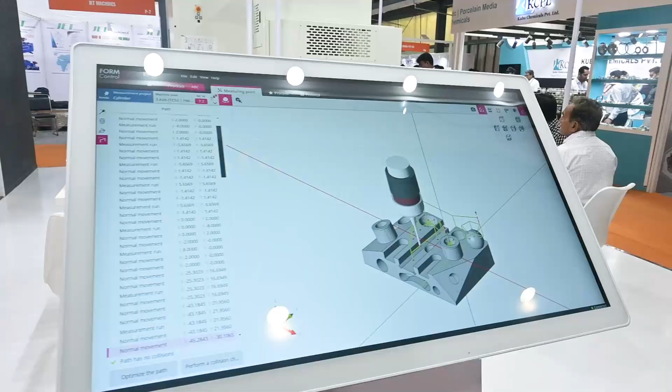Myself, Iranna Sidnal, responsible for business development and marketing activity, West and North regions. We are from Blum. Blum is a German-based organization, a pioneer in production metrology systems based in southern Germany, with more than 50 years of experience in the field. We have divisions like compound division, machining division, and measurement division.

Here we are demonstrating live our production metrology systems like tool setting systems and work setting systems. In tool setting systems, we have contact type and non-contact type systems where you can check length, diameter, tool form, and tool wear on the machine.

Production metrology plays a major role during machining. Everybody says they will check metrology pre or post machining, but if you control metrology during machining, the end product will be without deviations. The main intention behind implementing production metrology in the machine tool industry is to reduce non-cutting time, increase productivity, and reduce human errors, which increases production in both die mold and part manufacturing.

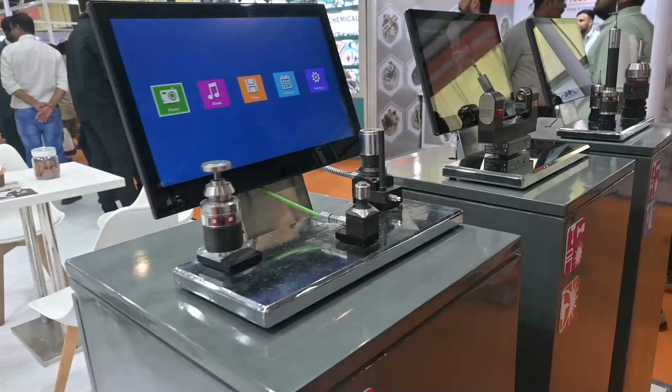For that, we have different products displayed here. These are the tool setting and work setting systems. You can see the tool setting contact type systems for length and breakage, length and diameter up to 0.5 diameter, and laser, which is the complete tool measurement system for length, diameter, form, single cutting edge, and scanning of the component depending on machine and controller, where you can check a minimum tool diameter of 10 micron. It's very difficult to have both tool setting and breakage detection otherwise.

Similarly, we have a probing system where you can do complete component setting, component measurement, as well as work offset setting and casting-to-machining variations, which can enhance your productivity. If you have any B-axis correction or B-axis variation, you can address that too.

The advantage and key features of Blum probing systems: we are the world's fastest probing manufacturer, with up to 2 meter and 3 meter measuring feed, and pre-positioning up to 10 to 15,000, with no interchangeability or run-out setting issues. This makes it a very user-friendly system for the industry, where operators can use it easily to enhance productivity.

Similarly, our laser goes up to 10 micron. We have a 90% world market share. Name any 5-axis machine, and it comes along with a Blum laser, because of our pioneering engineering, high accuracy, and high reliability, which can work under high pressure, coolant, oil, or whatever conditions, giving you complete measurement on the machine.

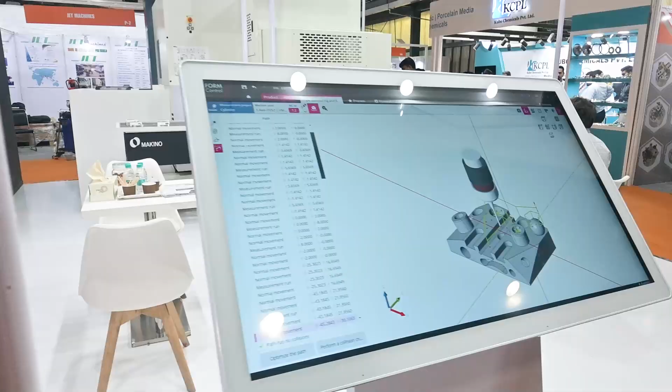Coming to the 3D inspection software, once machining is done, the industry challenge nowadays is everybody wants job measurement on the machine. Because if you take out a job, like bigger components such as an impeller, and take it to the CMM for rechecking, if you find any deviation, it's very difficult to reset the job and remachine it, because you won't get the same references.

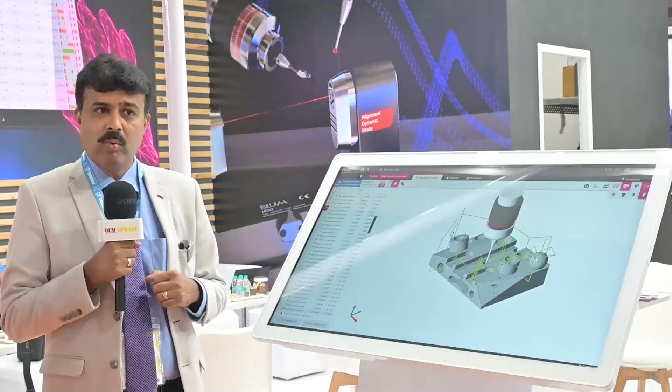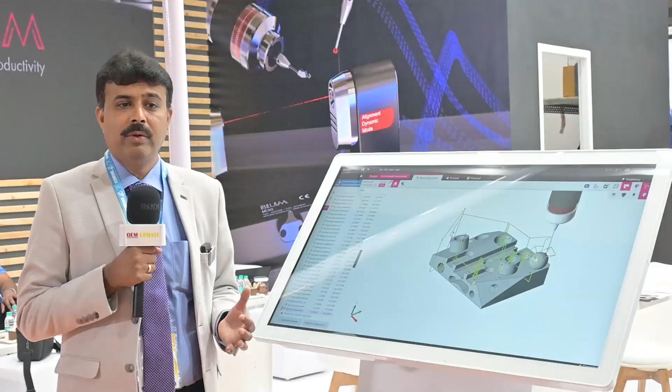So we have a software called Form Control where you import the CAD model and select points. Our program is generated automatically and sent to the machine. After machining, the probe checks the job and gives a report like a CMM, with deviations and minimum/maximum tolerances. You can then recheck and remachine, enhancing productivity by 100% without any deviation.

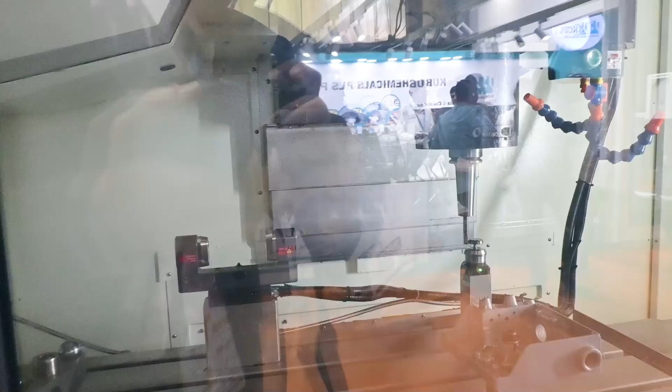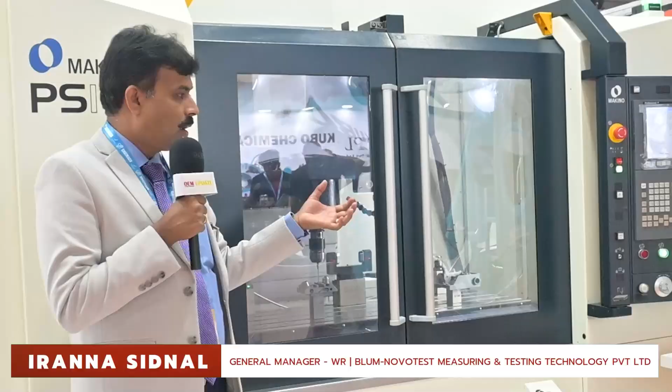Relating to my previous explanation, here we have installed all types of systems. Now you can see the 3D measurement software working, checking a job, and you can see the simulation of how it takes out points and measures the component. With the probe, we have tool setting, length, diameter, a complete measurement system, and length setting system, and as I said, now it is doing a job measurement. I would like to request all of you to come and witness the live demonstration on the machine.